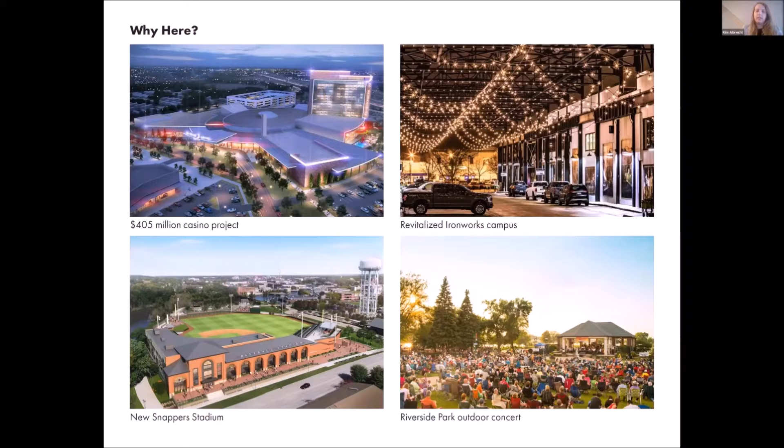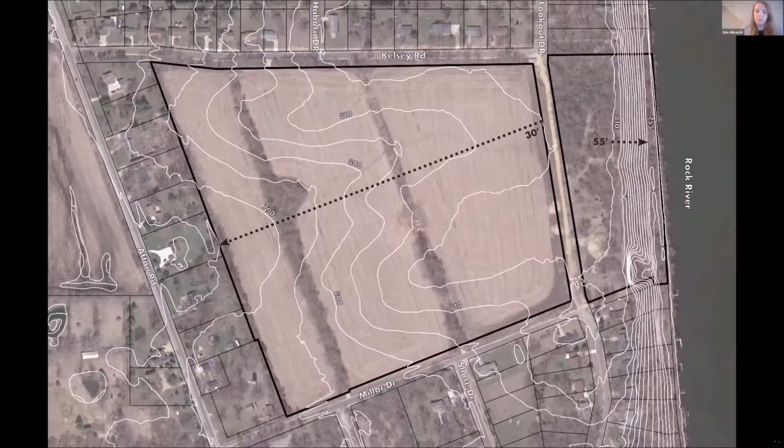So the site's pretty connected by bike and car, but it creates some problems in terms of walking for pedestrians, since there's not a lot of sidewalks nearby.

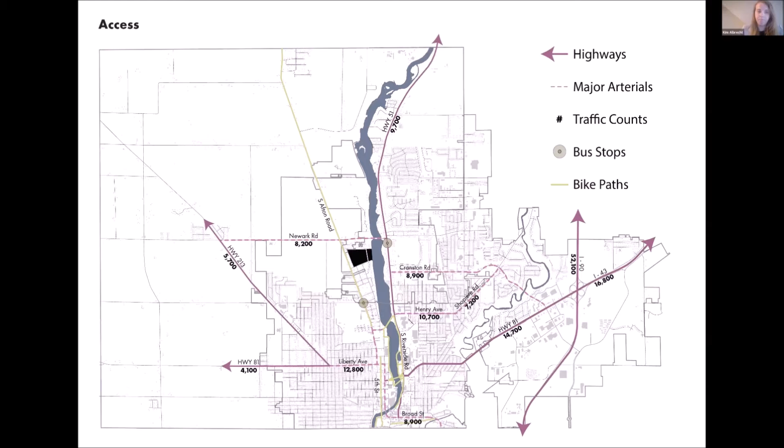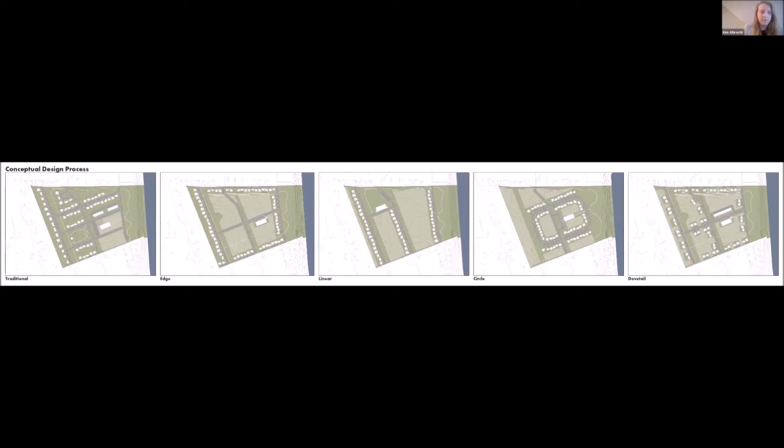So the first one is the traditional development, essentially having houses back to back, larger lot sizes, and a lot of road access points. This one yields the most housing units, with 60 single family homes and 16 townhomes, but the least amount of farmland at 5.3 acres.

And then comments early on related to this one, seeing that disconnect between the community amenities here and the farming with the housing in this area. So that's something that we wanted to change and make sure that they were integrated.

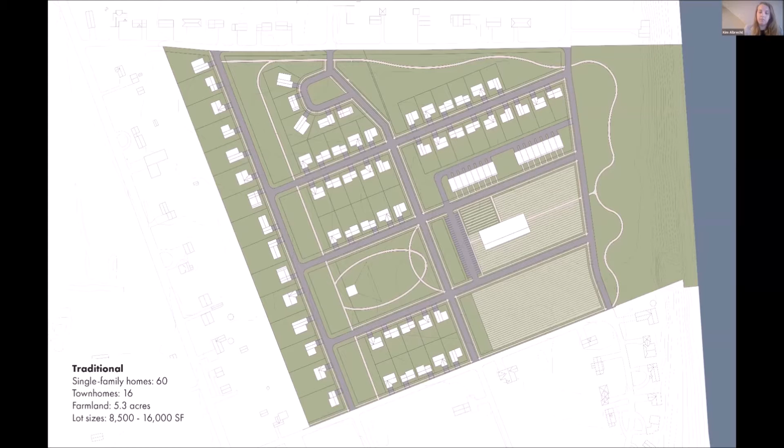So Edge is the next design that started to do that around the border and having those views towards the growing areas, but the way the housing is set up, it kind of disconnects people, the public, from the site and makes it feel more private. And that's something we wanted to avoid, kind of opening up the site.

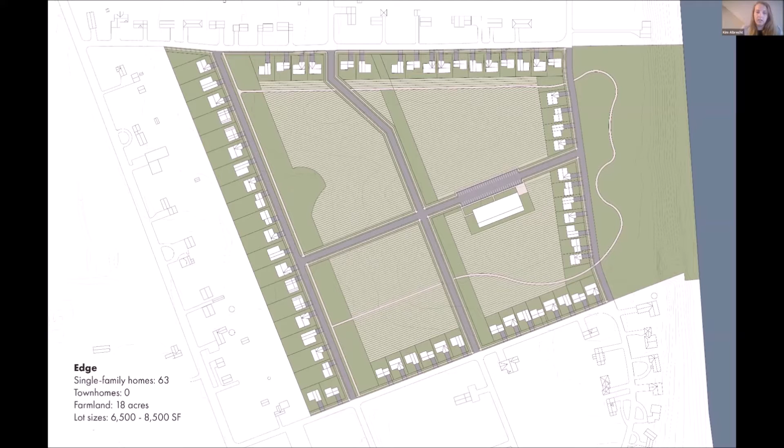The next one being linear produces the most area for farmland, but the least amount of housing. And again, there's kind of a disconnect between neighbors as they're just in lines and separated by the growing areas.

And circles started to blend agricultural and housing development, having it both in the front of houses and in the back. But again, having that barrier around, so it didn't seem as accessible to the public.

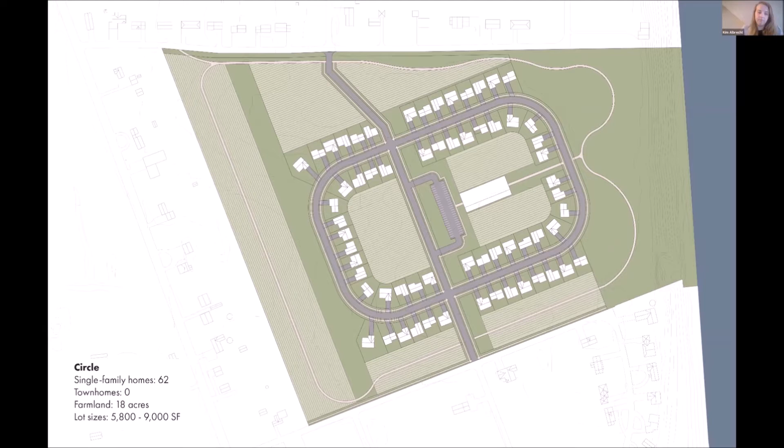So Dovetail is the one that was chosen to move forward with, and it created the best balance between agriculture, recreation, and housing. This one changes a little bit moving forward, but 56 single family homes, 14 townhomes, and almost 20 acres of farmland. So it's kind of the best of both.

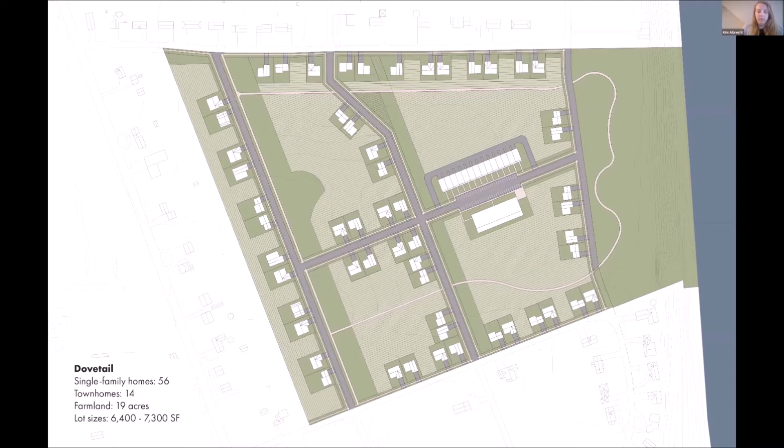So this is a more refined site plan. I'll go through it briefly and then you'll see a different view. There's housing in pairs with growing areas in between each node, and two different types of growing areas: taller row crops shown in these green areas, and smaller row crops shown in the areas between the housing. The larger row crops in the middle are more accessible for larger equipment.

And then moving towards the river, there's more of a conventional park space with outlooks looking out to the river.

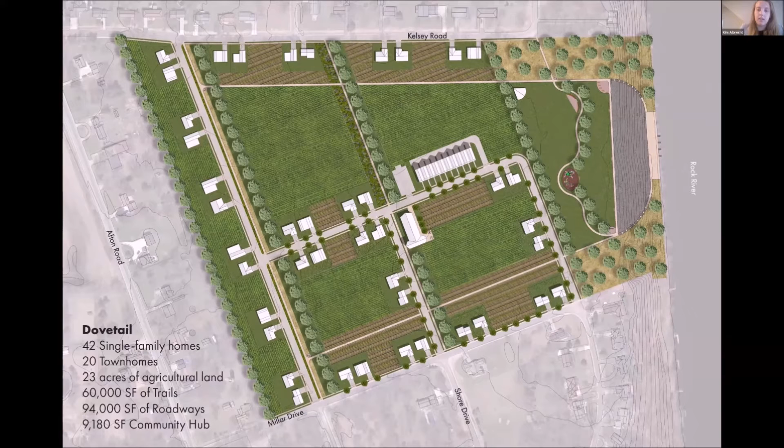Each node and category has its own programmatic opportunities, but these programs are also meant to be fluid with one another and flow throughout the site.

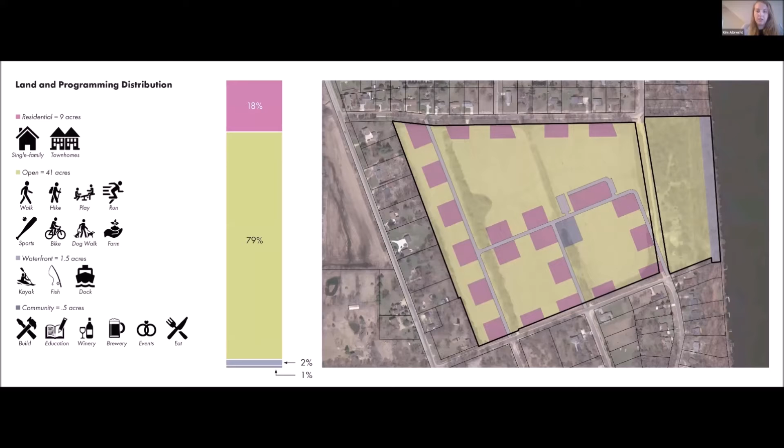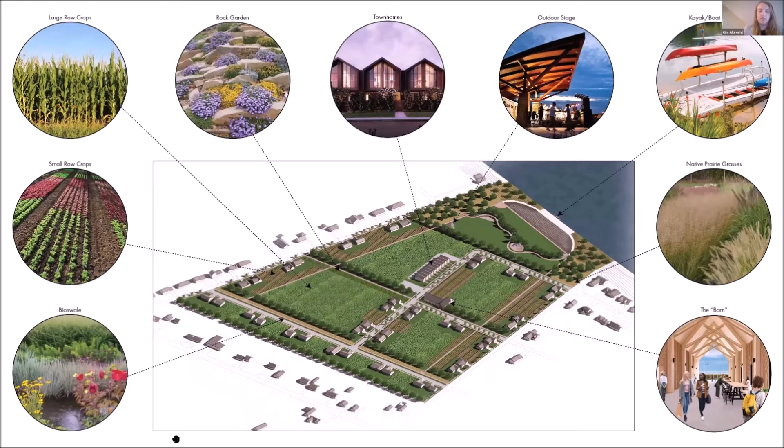So there's certain things I wanted to call out on this map. First, we talked about how the stormwater travels down this way. Having bioswales lining the streets is a way to collect stormwater and have it soak into the ground before entering the sewer system.

The smaller row crops would be smaller vegetables like lettuce, carrots, and beets, so that you can preserve the views between homes. Larger row crops like corn or maybe wheat, depending on the year, go in the central areas that are larger and not as easily done by hand, while the small row crops are easily done by hand.

And then this is an image showing what the townhomes could look like, matching the aesthetic of that community hub that we'll get to.

Having an outdoor stage area, somewhere you could host concerts, a summer concert series, really drawing in people from outside of the community. And on the river, having kayak and boat launches gives people a way to not only access the site, but also have those recreation opportunities.

And then in areas that aren't conducive to growing crops, we have native prairie grasses surrounding that park area.

And lastly, the community space that we'll get more detailed on, that I call the barn, is where you can host a variety of events and farmers markets, a place for the community to enjoy, and also people within the area.

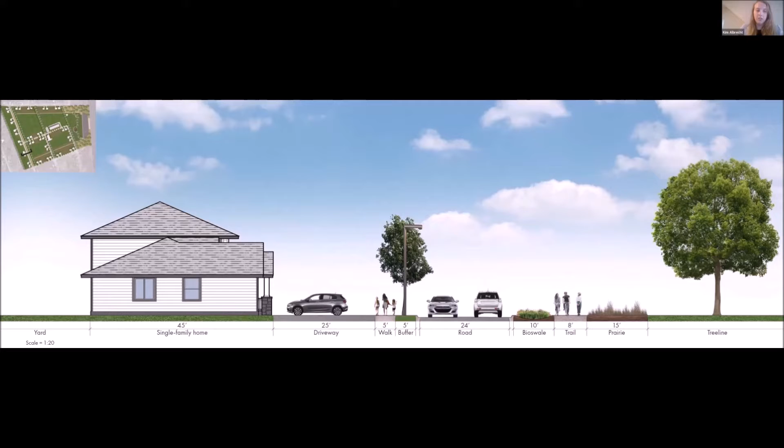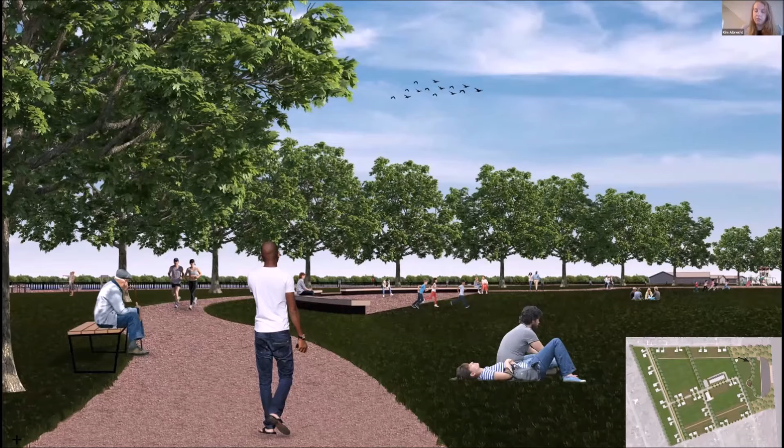This is a view from the more conventional park space with a large lawn area outside the outdoor stage area, so you could have a wide variety of events there. It overlooks the river, with outlook points on the corners to have unobstructed views of the river past the trees, and a playground area for kids. So there's a variety of experiences here.

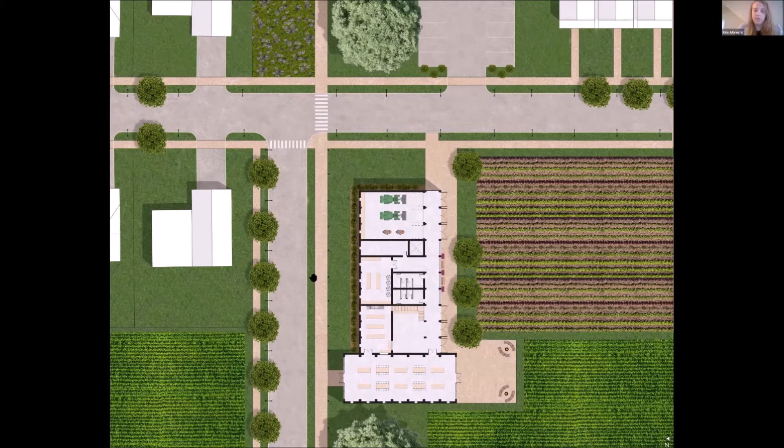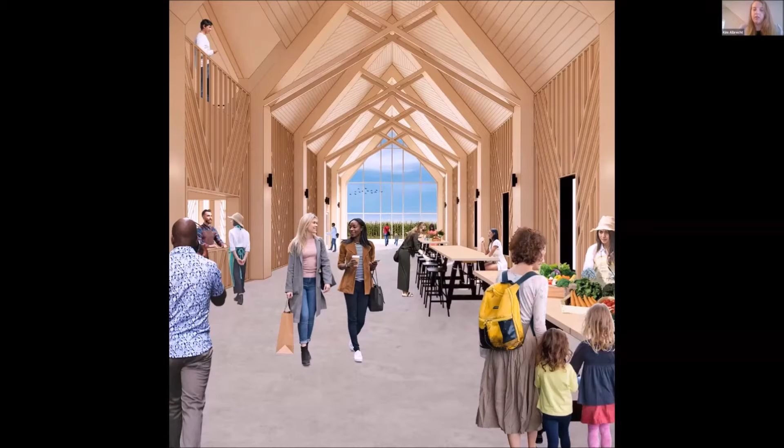This is an interior view of that large gathering space, right now shown hosting a farmer's market. It could be used for a variety of different activities, but essentially having that connection between the interior and the environment is the big key in this space.

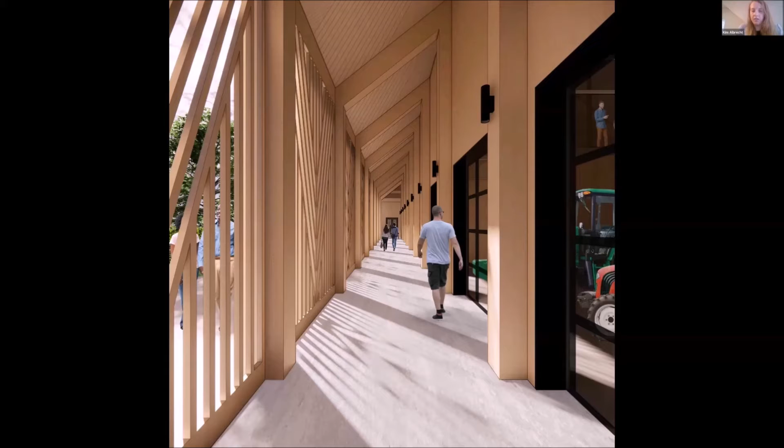This is the corridor that's essentially a screened-in porch, but these lattice systems could open depending on the time of year or if you want more wind through the building, with views into the equipment storage space and towards the growing areas outside.

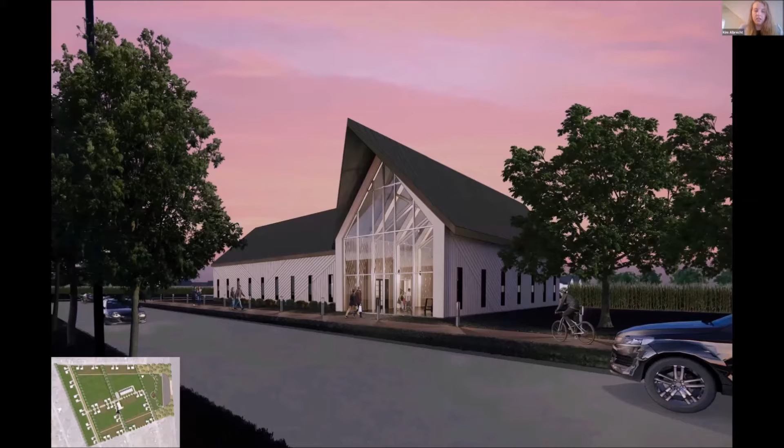So this is the front of the building, the first thing you would see coming onto the site. The orientation of the building was meant to serve as a gateway to the site, with the large gathering space being the focal point as you drive in through the main street, a space you can use at different times of day and year for a variety of activities.

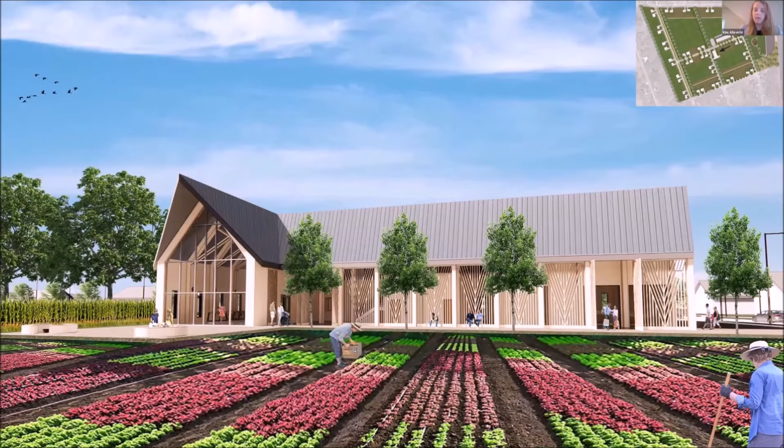This last perspective is a view from the growing areas looking at the building, showing how those screens could be opened up to provide more views and natural ventilation through the building, and showcasing how much activity is going on and how you can be exposed to these types of activities at all times on this site.

Essentially, the biggest idea was to focus on how to make this site outside the status quo. How can we avoid a traditional development type where you see, like on the left here, cul-de-sacs, lack of shared spaces, maybe a sidewalk here and there, houses back to back or fenced in, with no connection to neighbors and no shared experiences. With this design, it's meant to create that sense of community by connecting people to their neighbors and to the environment. So that's it, thank you.

Yay, we're all clapping. Yes.

I'm excited because you've talked a lot about the different scales of community, and you've been able to illustrate from a growing aspect of community engagement and education right down to the community building.

Kim, just be aware as you're turning back on so you can see us, it will cover some of your images as we have a dialogue, so you'll probably need to move some of those. I don't know how to, did that help? Or you can exit out of full screen. I don't know if that will matter at this point, but otherwise I think you might need to just listen to us and not see us. Okay, that might be okay. All right, I can put it back the way it was.

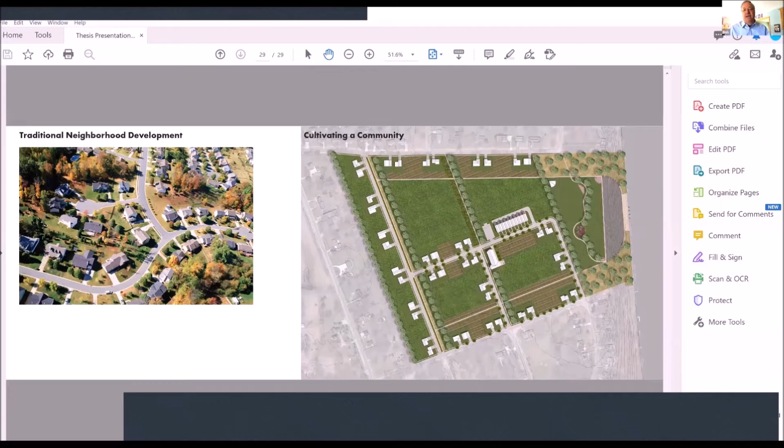Well, first of all, congratulations, Kim, on a superb job. From a Beloit community standpoint, you really hit a lot of the marks as far as what could be a really exciting project in Beloit. The idea of having a community with connection to agriculture fits well with the farmers market we have in town, which is a huge draw, so people are very connected to local farmers. The usable riverfront is really something else. When I first thought about this, I went right to the traditional neighborhood, rolling up a bunch of houses on the riverfront. But to see how this can all be connected, so the residents and the community has access to the riverfront, is really awesome.

Well, thank you, Bob. And one final thing, personally, it's a place where I'd want to live. I had no idea where this was going, but to have exposure to an agriculture environment with a low maintenance, smaller lot, yet having more public area to enjoy, and still have the utilities, sewer, water, electricity, and internet in town that you can utilize while still enjoying that outdoor agriculture feel, I think is just really outstanding. So I'm very excited about it. Thank you, Kim. Well, thank you.

Before we move on to Carl, there is just one question. I know you addressed stormwater management and we talked a little bit about flow. Could you highlight how you imagine stormwater would be managed and the locations for some of those elements? You can use a site plan, I think.

Yeah, so as I mentioned, the site gradually slopes down this way, so I have these beds here along this trail, and beds here along the road. As it flows downward, it's collected here in a divot, which is able to collect a lot of the water and let it naturally soak into the ground, filtrating it before releasing it into the sewer system.

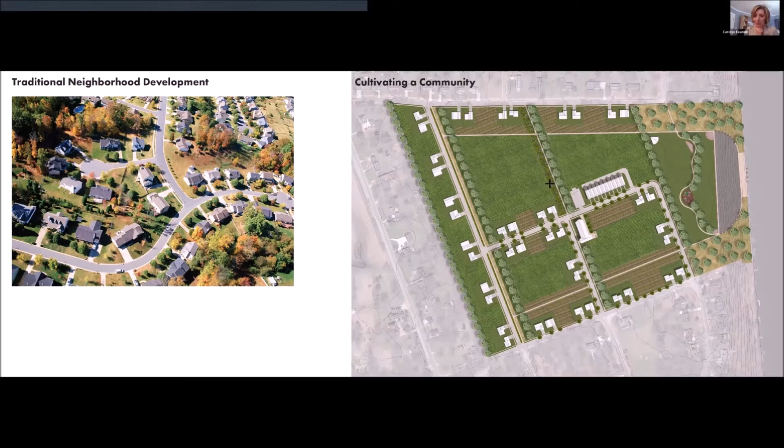Yeah, I'll go back to your first question. Like you said, it was a back and forth of trying to decide the growing areas being visible from the front yard versus the backyard. Kim, as you're talking, show the perspectives that relate to Jory's comments. One is from the porch and one will be your building.

Yeah, so personally, I think what it came down to was how I interact with spaces and people close to me. I personally prefer hanging out in the backyard instead of the street side, just because it's usually quieter. Having that space to enjoy the crops, being focused in the backyard, was a conscious choice, just because it feels safer, more secluded, but also more peaceful.

But then being able to walk out your front door, say you're on your front porch, you can still see those areas maybe across the street. Is as close as it gets for that, or the pieces in between the nodes, like this area here is visible from the front as well, not looking straight out. Essentially it was a decision to have those areas visible from the back. Did I answer that question, or should I keep going?

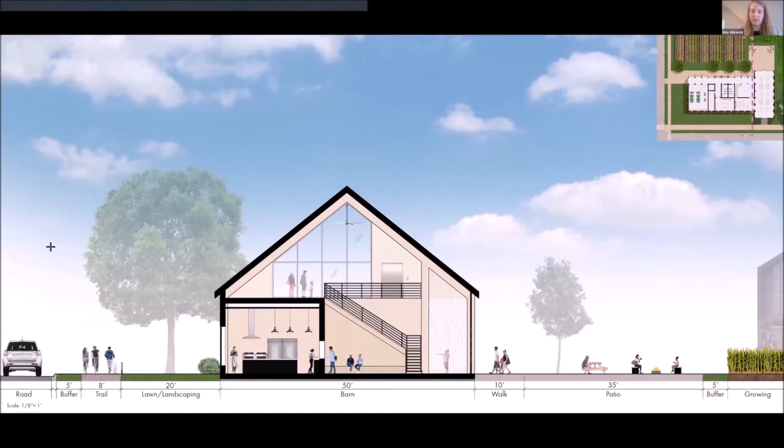No, that makes sense. Just looking at that backyard perspective, my kids and the kids in our neighborhood would be tromping on every crop there, running to get their ball and chase each other. And yeah, that is... you can't do everything.

You can't do everything in these things. It's a great project. Maintaining the crops would be really important, how they look as well. Obviously they're shown here in good shape, but you can't always control how they're going to grow and people stepping on them. Hopefully I usually put at least a buffer between the trails and the crops, so you're not stepping on them immediately.

I think it makes the pathways really important though, the smaller scale pathways. I feel like this whole thing would have a really strong network of the sneaky paths that kids would take to cut between things and move around, and that everybody would take just to get around.

I think the scale of the path is also critical. There were a couple of questions about 8 foot versus 10 foot. In my practice, the only time I've used 10-foot trails is when I have to use Department of Transportation funding and they require 10 foot, but 8 foot is, I think, a more appropriate scale for this. That's how wide a parking stall is, so you can easily have people running in either direction.

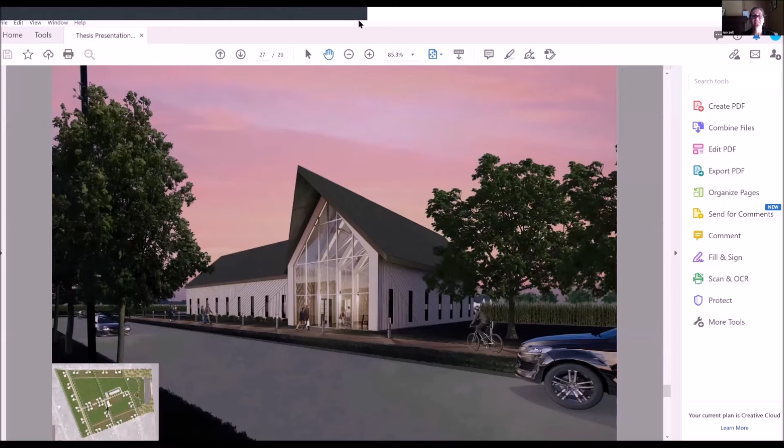Okay, yeah, I appreciate all the feedback and all your help. So thank you for being here. Well done, Kim. Yeah, well done, and good luck. Thanks to all the guesters and for enjoying the rest of your time looking at the SARUP projects. Yes, congratulations, Kim. Thank you. Congratulations. Glad to have seen what you did. Good job, Kim. Good job, Kim. Thanks for kicking us off this morning. Yeah, sounds good. Thank you.

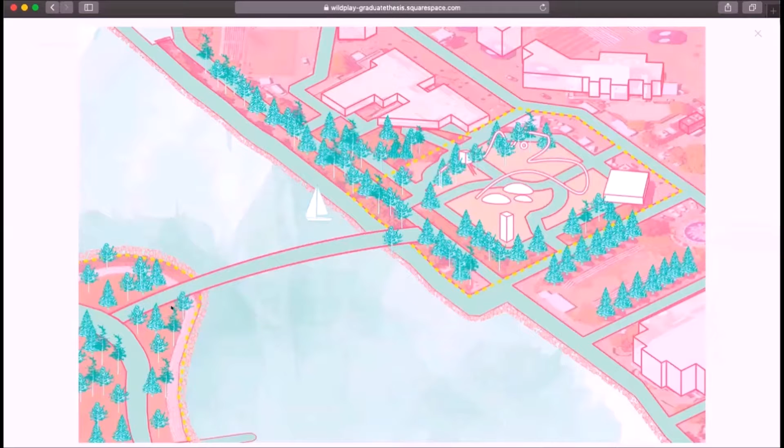The Henry Maier Festival grounds have been around for more than 100 years. The site has a rich history, starting as a train station in the 1900s, becoming the Maitland Airport in 1927, later the Nike missile site in 1956, and eventually home to the Summerfest grounds in 1968. Unfortunately, 9 out of 12 months of the year it sits vacant, which is a missed opportunity given its location along Lake Michigan.

Located in the Henry Maier Festival grounds currently sits a lackluster Children's Zone area, which is not utilized as much as it could be. This thesis looks at how to redesign the Children's Zone area and create an educational experience and new definition of play by creating a connection between the Children's Zone area and the Lakeshore State Park.

To begin the research, verbs that describe both human and animal behavior associated with play were studied and collected. From the chosen verbs, different objects were sketched and defined based on how they would be used by humans of different age groups as well as wildlife.

The verbs that were deemed most successful based on how well they incorporated both human and animal interactions were further developed and evaluated based on how the type of play may shift in correspondence to the season and time of day.

This was done to ensure the site would be utilized daily and seasonally, whether by humans or wildlife. Many different species of wildlife can be found around the site, but only 9 species were chosen to design for based on current or future needs for their survival in urban cities. The list includes the red fox, the great horned and snowy owl, the groundhog, mink, fish and birds of many species, the big and little brown bat, fireflies, and bees.

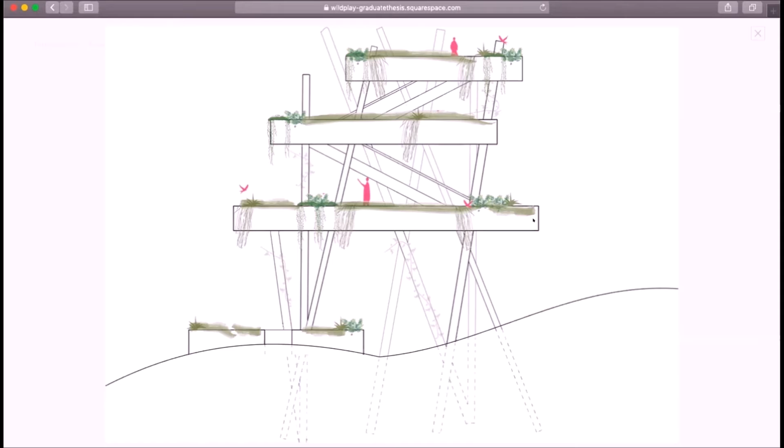The observation tower was designed to imitate a tree to blend into the site. The legs of the tower resemble the trunks and branches, while each floor can be thought of as the crown of a tree. The form of each floor is also irregular and fluid, much like the topography below it.

The legs of the tower extend into the water below and are covered in vegetation, which help create habitat. The legs are also made out of wood, which will help attract an array of fish. A rich aquatic life within the water basin promotes healthy underwater vegetation, as well as fishing opportunities for those visiting.

Similar to the observation tower, the elevated path creates views above the site, whether utilized by humans or wildlife. The design of this path was influenced by the organic nature of Lake Michigan, which the site is situated on. The elevated path also connects to the Lakeshore State Park, which benefits the children at the Education Center to ensure a quick and safe navigation to and from the park.

It is also a necessary connection point to help encourage wildlife to travel this path instead of nearby roadways. The elevated path will be supported by the surrounding trees that currently inhabit the site, as well as additional trees planted and the bat and owl towers.

Located within the path is a 500 square foot netting structure. This structure acts as a trampoline for activity in the daytime, but will also serve as a relaxation spot, especially at nighttime during concerts under the pavilion, providing a place to relax and listen to music filling the park.

Along with the trees being used as structure to the elevated path, the bat and owl tower will help support the path in specific areas. The bat and owl tower is designed to inhabit bats through 6-inch vertical openings.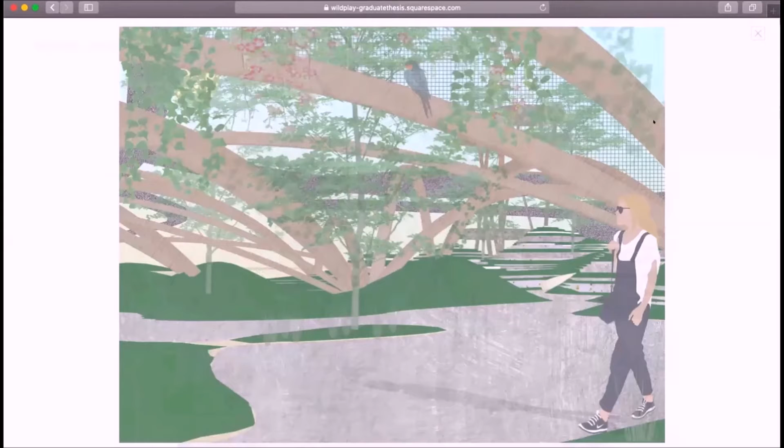Specifically at the entrance, there are two gardens on each side of the path. The spanning of the pavilion above also helps birds fertilize both sides of the garden. The garden will also be surrounded by natural wood, which creates habitat for fireflies and bees. Both of these species, in return, promote a healthy garden.

Students at the Educational Center will benefit by learning about the ecosystem of a garden and the wildlife and species that inhabit it.

Today, there is a current plan to add an educational center on the Lakeshore State Park. This park is already limited on native grasses, so including the center on the wild play site will create more space for habitat at Lakeshore State Park.

The Education Center is located on the south end of the site, under the rolling mounds. Having the center pushed underground allows for use on top, which grants more space that may be used for play and habitat. The form of the Education Center was influenced by the topography above.

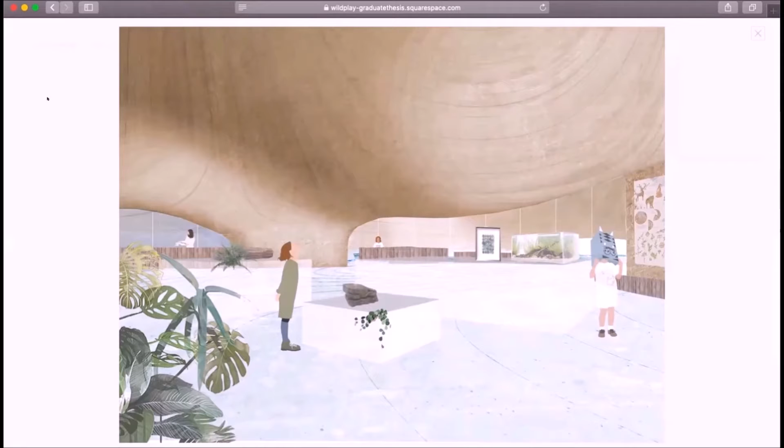Moments of glazing are also included in the mound layers to allow in light, which influenced where the programs were located in the Educational Center.

As well as entries within the mounds, there will also be back entries which will be able to be seen and peel up from the sidewalk view on the right side of the festival grounds.

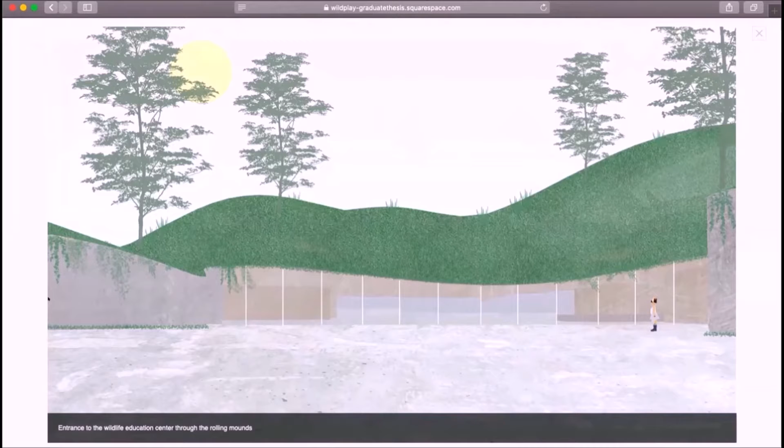The Education Center will host students on school trips and weekend activities for park visitors. Those at the Educational Center will get the opportunity to learn about wildlife in their native habitat and be able to be an active participant in nature. Workshops and galleries will also be hosted by the Educational Center, available to those of all ages.

Another important aspect of this project is to really understand the perspective of the wildlife inhabiting the park. Down here, you will find a perspective of each of the chosen species and what it would be like to experience the site through their eyes. I've also attached an accompanying audio to help you further place yourself in their perspective. I will briefly take you through these, but I invite you to further explore them on your own for better image quality.

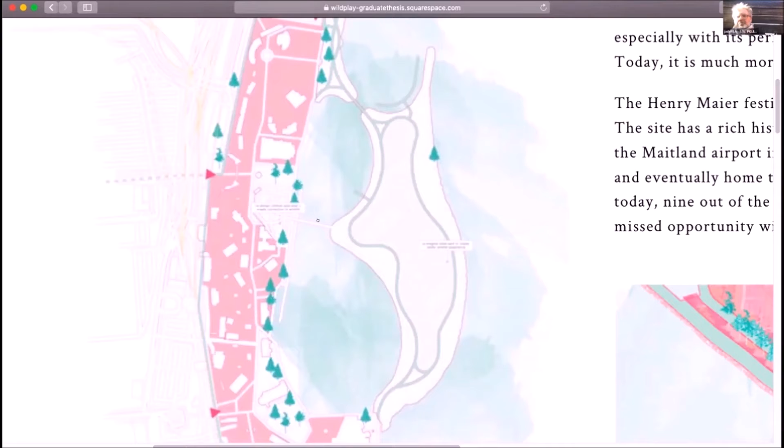So the idea is that there's a bridge there as well, so that bridge where your mouse is right now, that would be new. Yes, sorry. So this is like an implementation of my design and the current conditions, it was kind of like pre-design work. But yes, as you can see right now, there's only 2 bridges that cross over to Lakeshore State Park, and implementing another bridge is really just to draw that connection even further.

And it almost looks like there should be a bridge because of that dip in Lakeshore State Park. But further, it's funny because after talking to the DNR manager, there's supposed to be an education center going around this area. And I asked why they wouldn't put it over here, and they said because they need to have bathrooms for the kids, and they can't walk those bridges that are that far. So that's why I also implemented a bridge that's going directly across, so that kids going from the education center to the Lakeshore State Park make an easier connection.

Okay, I think let's see if I can do this here. Maybe I can - there it is. Is it this one? I have no idea where the damn thing is. Yeah, I don't know if I can draw. Yeah, I can draw - look at that. There we go.

One thing I'm curious about, if I understand this correctly, we can come in from above, right? Yep, and at the moment we can walk down here, and when the park is open we can also go through the Henry Maier Park, and then do the circuit and walk back up. So the thing I'm curious about, maybe it's a criticism too, is you're creating this little enclave that we can essentially go visit, but we have to know about it ahead of time. It's not something that's naturally visible, with the exception of this bridge we can cross over.

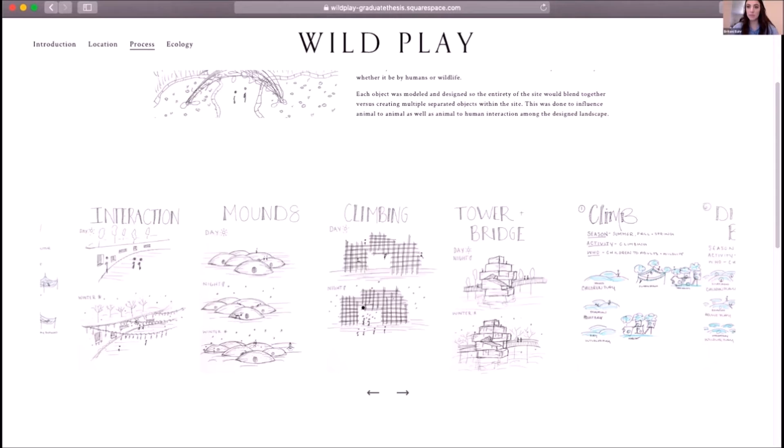And then based off of those ones, I took it even further and started to look at how they would be used in a day and night sense, and then also took it one step further and thought about how it could maybe be used in the warmer months versus winter.

And then from there, it was kind of back and forth between sketching and modeling. But that's when all of the COVID happened and we kind of got shut inside. So then everything went more digital, and I was still trying to form-make and make decisions through making forms, but in a digital world, if that makes sense.

So I was going back and forth between Rhino and Photoshop to create all these images. I have a Mac, so I don't have the ability to have any rendering programs on my computer, so that was a little bit tricky - it wouldn't necessarily have been otherwise, but yeah.

I think that might be something to add to your website - you showed us your sketches, but I would love to know how you tested those sketches. Particularly in the world of living indoors and not having tutors to go talk to, and not being able to sit next to somebody in studio, but that is critical - you learning that process of your own design ability is testing ideas.

The sketches at the minute kind of show us how you thought about that, but did you do sections, those sorts of questions? I think that would be an interesting aspect to your website. We expect our later students to really reflect on method and methodology, going into a PhD or something like that. So if you have time to add that to your website, just a reflection on that, and the testing of all these formal moves you've made, I think would be very useful to you, and also to show people your method.

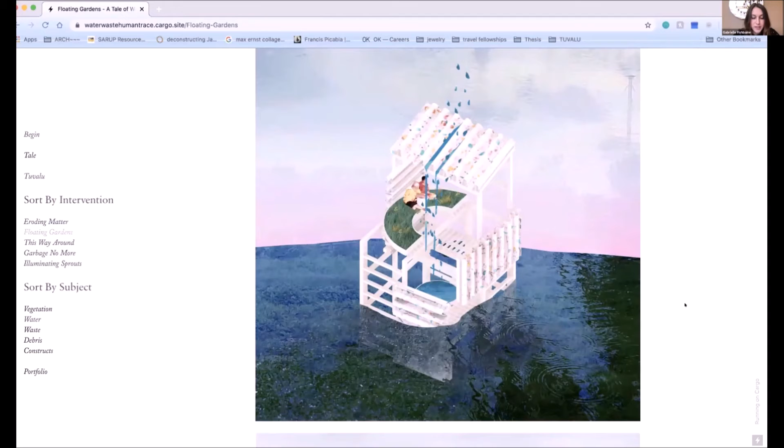The shading elements are made up of recycled plastic from the intervention entitled Garbage No More, which we will get to shortly. They can be attached in various orientations, protecting visitors from the sun, directing the water to the garden bed and catchment systems below, which provide a source of fresh water, a scarcity for Tuvaluans.

Rainwater is the only source of fresh water on the island. With each notch up, the garden beds are lifted up and away from the ground, while also providing a visible cue of the impact of these natural processes.

While in Funafuti, I observed these lifted platforms where people lounge during the day, nap, and the way the beds are lifted up off the ground are very much so inspired by these. Here's an image of the landing strip that becomes a large soccer field, and you can see the livestock pens in the background.

As we journey up towards the northern tip of the island, we come across the thinnest width of land, connecting the southern and northern parts by a bridge. This bridge is the only route to get to the Funafuti dump site, which collects all of the waste on the island, and the many homes located in the northern portion of the island, making it an essential route.

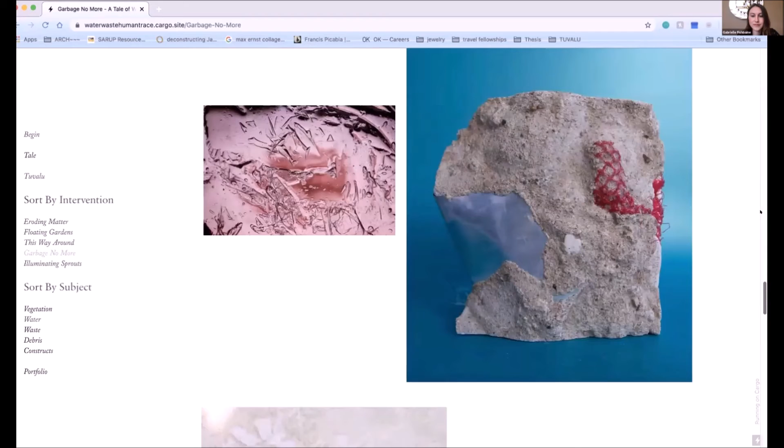These are images from the existing dump site. This is where waste from the entire island is kept. Once you go through the entire site, you're able to get to the very tip of the island and look out towards the other islets.

At the end of the island, just past Garbage No More, we come across the last intervention, entitled Illuminating Sprouts. As the lagoon, ocean, and sky flood the land, illuminating sprouts emit color dependent on the amount of water collected in the water tank below.

This is a way for Tuvaluans to quickly visualize the extent to which water is rising. The wind creates the dancing movement of the sprouts, surrounding those who visit. The collected water provides an additional source of fresh water. Looking up at the sky with the sprouts fluttering around.

This intervention was largely influenced by this model, which was exploring how such a delicate entity is able to be embedded into a solid, rigid form and still be able to have life.

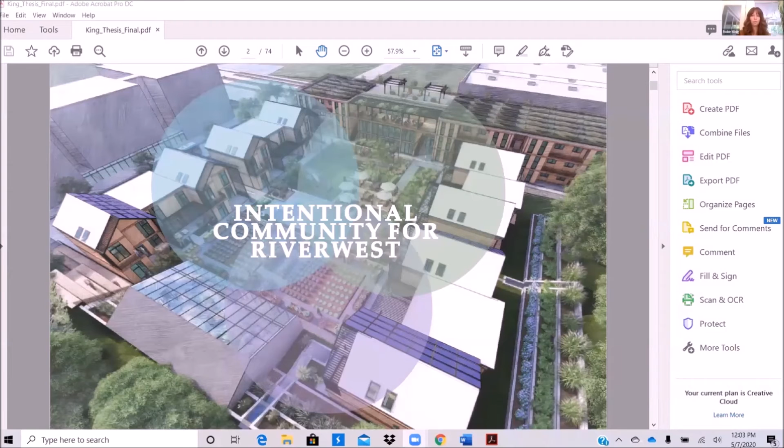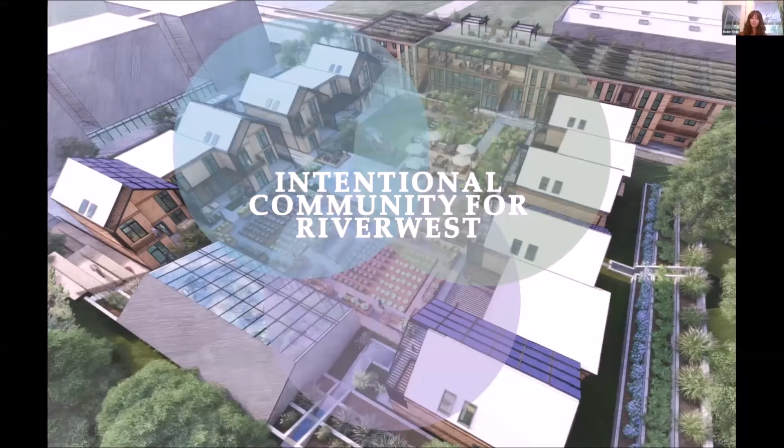These communities typically include apartments and houses for naval personnel and their families, parks and playground areas, schools, chapels, stores, even a bowling alley and movie theaters. And there were organized activities for kids and families all the time.

But then when I started high school, my dad was stationed at the Pentagon, so we moved to Washington, D.C. and lived in a normal suburban neighborhood. Although our neighbors were friendly and there was the occasional cookout, it lacked the social cohesion I was accustomed to. Since then, I have been passionate about learning what makes a community truly thrive.

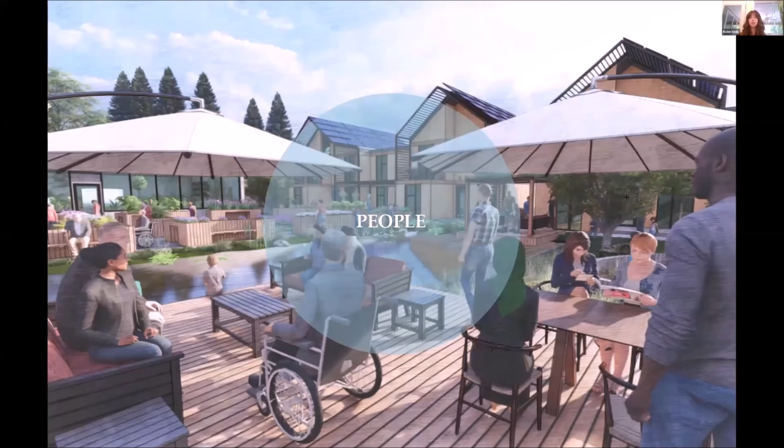With intentional communities, it's their ability to embody the triple bottom line, or people, profit, planet. Intentional communities are typically formed by a group of people who share ideals or views, and community bond is a driving factor. There is large value placed on planned social events, community meals, and chance social encounters with neighbors.

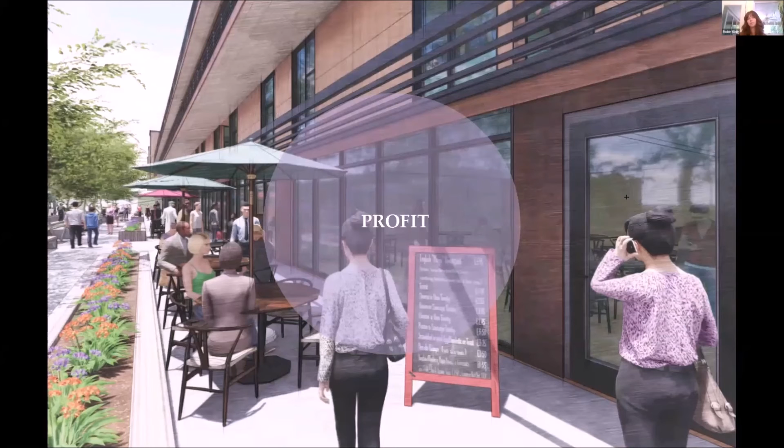Intentional communities are structured as condominiums or cooperatives, where you have ownership of your dwelling unit, but share the responsibility of the land and common space. They also promote lifestyle affordability with shared meals, shared childcare, car sharing, etc. And many of these developments also have rentable commercial space to benefit the community.

These communities are often environmentally conscious and can implement sustainable strategies on a community-wide scale.

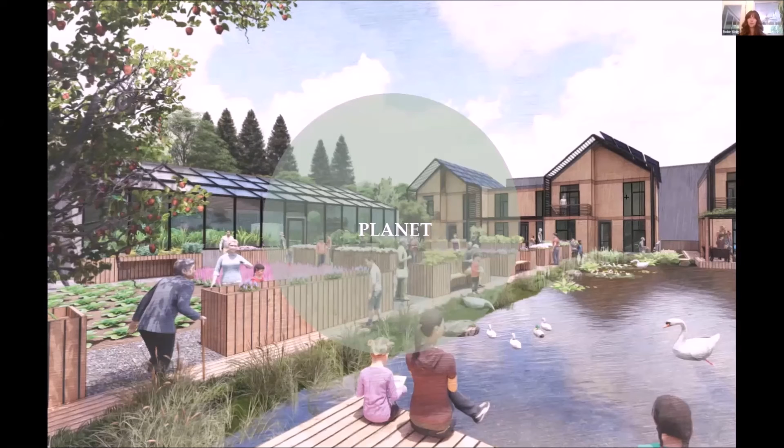So I looked at 6 different models of intentional communities and drew out 6 patterns of successful ones. The first one is co-housing, and co-housing is a community of private homes clustered around a common space. The focus is on people, and the nucleus of that is the common house.

Co-living is shared housing with shared intentions, and co-working is also very common in these spaces. This is more profit-oriented, and live workspace is essential.

Housing cooperatives are a different type of ownership. The cooperative or corporation owns the building, and the residents have shares in the company, and those shares include their dwelling unit. It can be very profit-focused, and rentable commercial space is common.

Eco-villages are communities that strive for sustainability and lessen possible negative impacts on the environment. Naturally, they are planet-oriented and ecological interaction is prevalent. In communes, which are groups of people living together and sharing possessions and responsibilities, they are also planet-centric and focus largely on agriculture.

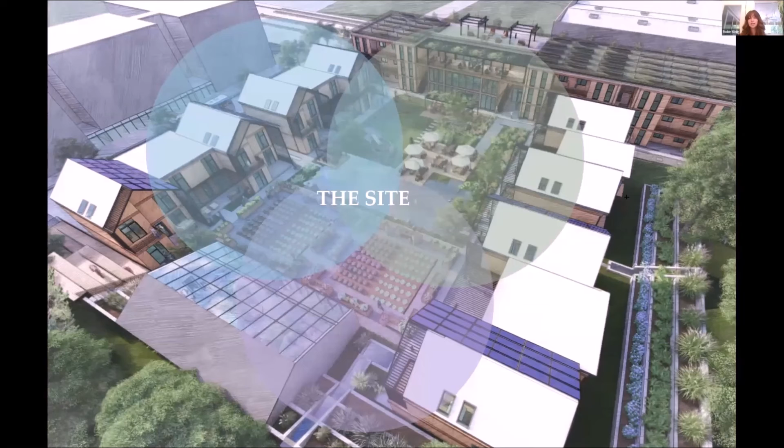These elements present in good intentional communities are successful when blended together in culturally and site-specific ways. My site is located in the Riverwest neighborhood of Milwaukee, Wisconsin.

Milwaukee is located on the western shore of Lake Michigan. It is the largest city in Wisconsin with approximately 600,000 residents. The Riverwest neighborhood is located on the western shore of the Milwaukee River and has approximately 30,000 residents.

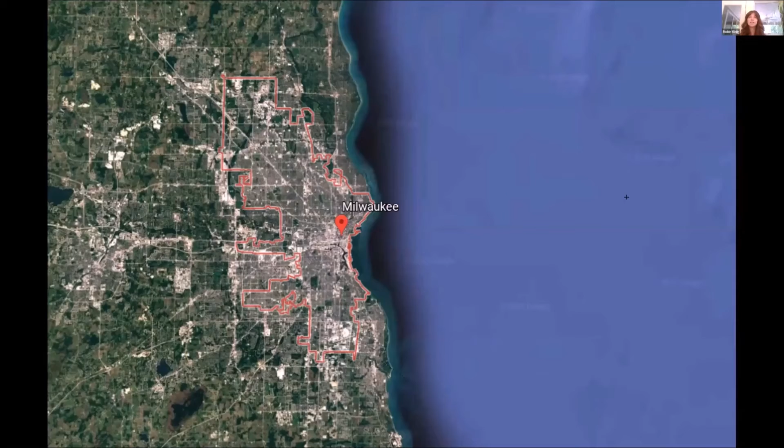This neighborhood has seen significant changes over the past 10 years as the area gentrified. It is now one of the most racially diverse neighborhoods in Milwaukee, but home ownership has decreased significantly. Now over 70% of residents rent and 31% of residents live below the poverty line.

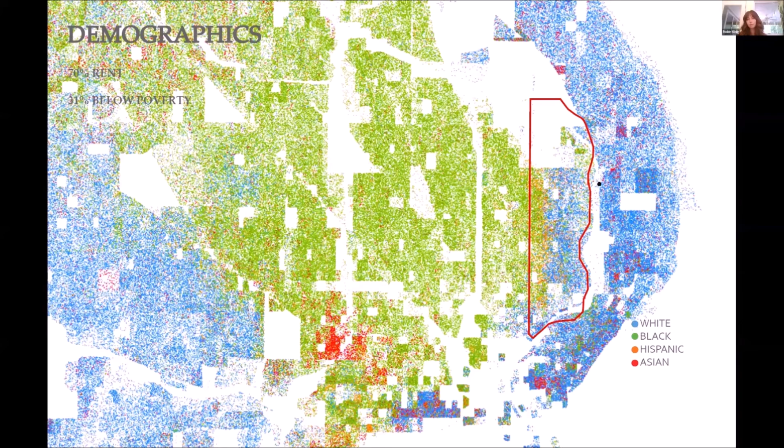My site is located on North Avenue, adjacent to the Riverview dormitories and the Milwaukee River, and extends west to Humboldt Avenue. I selected the River West neighborhood because it was a location that could support and benefit from an intentional community.

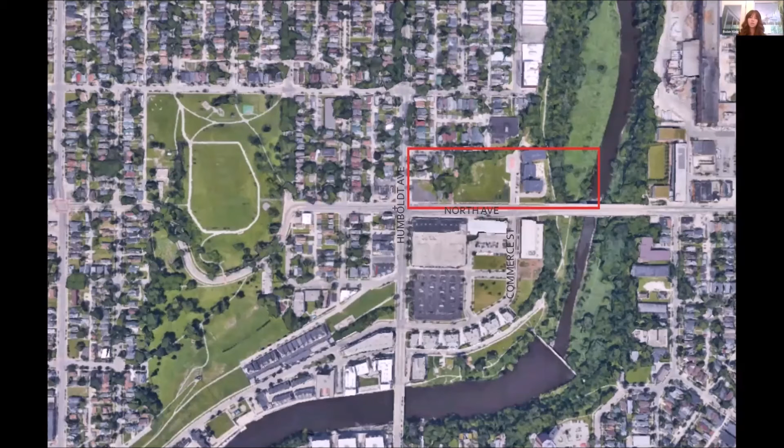Over the past 10 years, this neighborhood has become more transitory and without a heart or center to the community. During this time, many medium to high density housing projects have been built along the river on Commerce Street, and these buildings were built for isolated housing. Most of these buildings have no community space, and the neighborhood has little to offer in that regard as well. Although there was a significant increase in housing, there was little new development in commercial aspects like restaurants, and there are few places to gather or have chance social interactions without going across the river.

However, this site does have some advantages. It is located directly across the street from a large grocery store, a Pick 'n Save. It is also located adjacent to the Milwaukee River and the Oak Leaf Trail, which has over 160 miles of paved bike path. The North Avenue Dam is just south of my site, meaning the part of the river adjacent to my site has a natural ecosystem before it flows through the hard edges of the Milwaukee Riverwalk, downtown, and out to Lake Michigan. To the west of my site is Kilbourn Reservoir Park, which hosts community activities like live music.

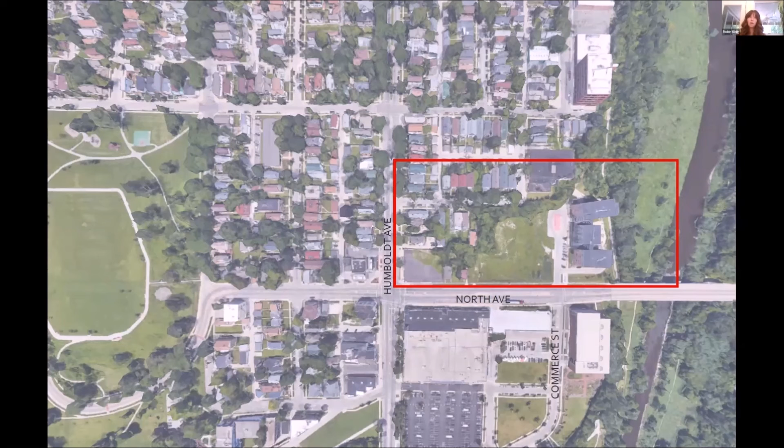This is my site as it is today, with the existing single-family homes to the north, Riverview dorms and the river to the east, North Avenue directly south with the new apartments lining Commerce Street, and Humboldt Avenue to the west. Both Humboldt and North Avenue are busy streets accommodating roughly 20,000 cars a day.

So the first thing to do would be to put the streets on a road diet. This would reduce vehicle speed, add a median as a buffer between bike and car lanes, and widen the sidewalk on the north side of North Avenue. This widened sidewalk would create a nice microclimate to accommodate outdoor cafe seating and increase pedestrian traffic.

To support this, I'm proposing a mixed-use development to hold the corner. This would create commercial space on the street level and housing above.

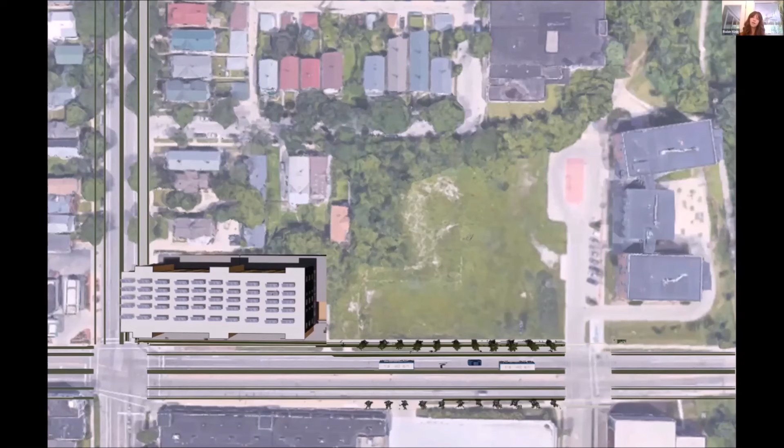East of the mixed-use building would be the common house, which serves as an anchor to the intentional community. On the left and right of the common house would be apartments for the residents of the intentional community. The common house and apartments sit on a plinth that houses more commercial space on North Avenue. The building serves as a wall to create some privacy for the intentional community.

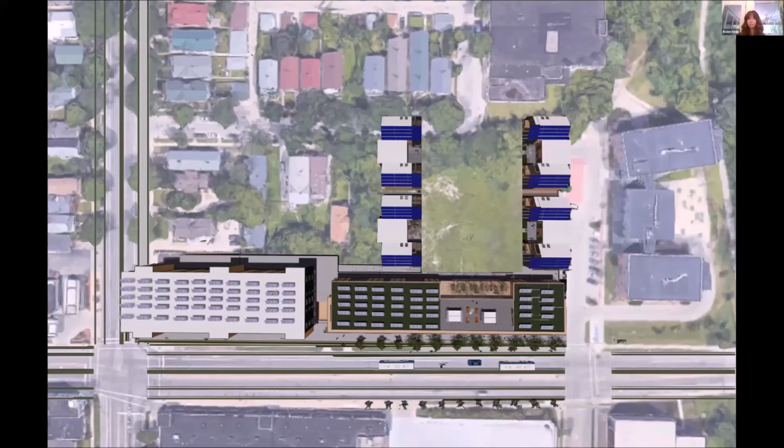In the intentional community are rows of north-south oriented gabled roof houses, a greenhouse centered on the north edge of the site, and the north and west edges would have terraced retaining walls to respond to the grade and create a flat community center for gardening. This also includes a ramp on the northeast corner connecting the neighborhood above and the community down to the Oak Leaf Trail.

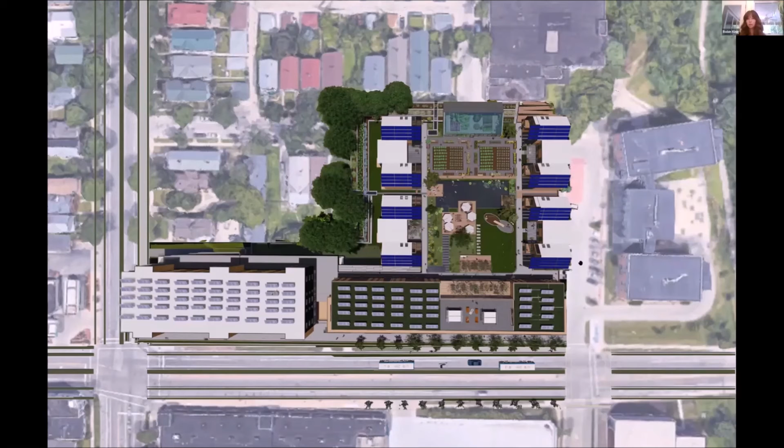There is a large retention pond and several other water features to channel water to this pond, and various spaces to live, play, and socialize outdoors. The main vehicle access to the community would be shared with Riverview dorms, so the existing entry would be modified with planting strips and lined with trees to create a boulevard benefiting both communities.

The site, including the proposed mixed-use development, is 1.9 acres. Less than half, or 0.8 acres, is taken up with the housing footprints. So 1.1 acres is left as open space.

Now, let me show you the plans.

Level 1 houses the commercial space for the common house building, and behind that is a parking garage accessed off of the new Riverview Boulevard. This garage is for the apartments and the row houses on the west side of the site that do not have private garages. Along the boulevard are the private garages for the east side row houses. These houses also have flex rooms that can serve as live workspace.

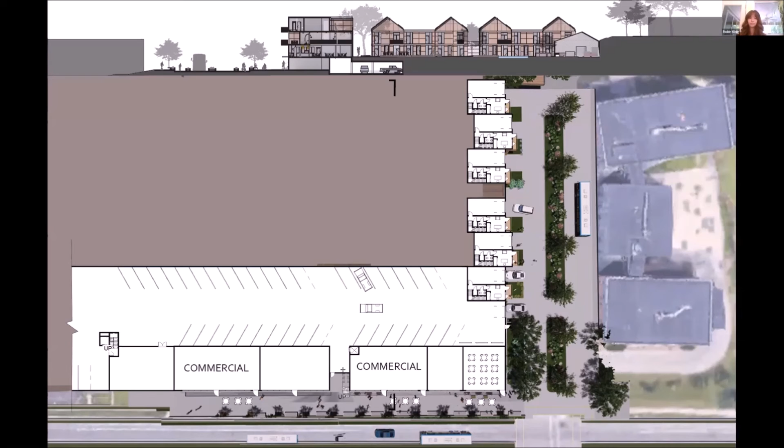The heart of the community is one level up, and the primary access is through the stairs and elevator portal to the common house. From that portal, you can enter into the common house or continue into the main garden space. The primary entries for the row houses are on this level, as are the entries for the garden level apartments.

The apartments are divided by micro portals here and here, and every unit has private access from the exterior. The row houses are multi-story with internal circulation, and all apartment circulation is external, with the upper levels of the apartments accessed off of the stairs in the micro portals.

Each portal services 6 units, 2 on each level, and the common house levels are all accessed off of the main portal.

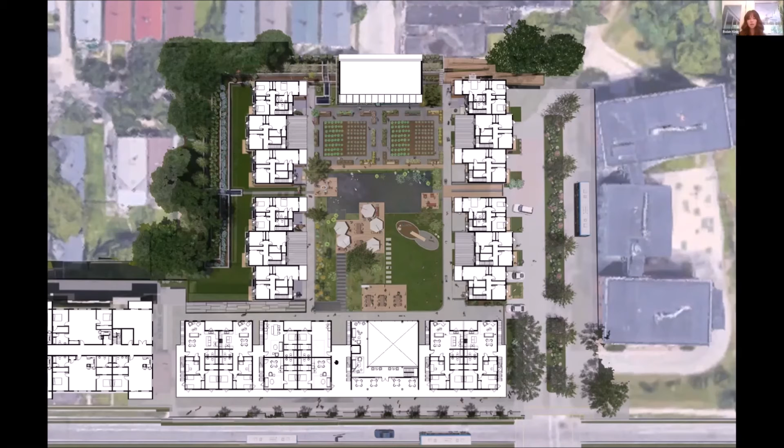All apartment levels are identical with 4 2-bedroom and 4 1-bedroom units. The upper 2 levels of the apartment each share a balcony on the south side, allowing for additional egress and a place for neighborly socialization.

There are 36 total dwelling units in the community: 12 1-bed and 12 2-bed apartments, 6 3-bedroom houses, and 6 4-bedroom houses.

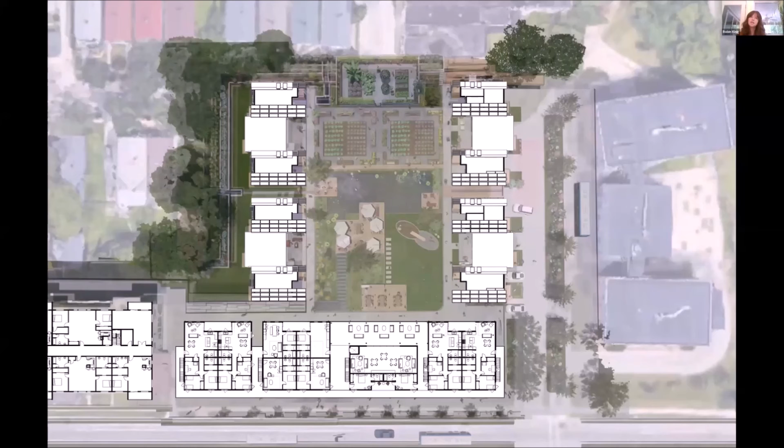The 6 homes on the west side of the site are 3-bedroom units and approximately 1,400 square feet. The east side units are approximately 1,700 square feet. These units have private garages and an additional bedroom and half bath, and this room could be used as a live-work office space or for additional separation in a multi-generational family household.

The second level hosts the main living space with a great room and has a flex space and balcony. This flex space has sliding doors on 2 sides so that it can be enclosed or open to the room. I have it set up as formal dining in my render. And there is a covered patio space connecting each unit to the green space.

The third level houses 2 bedrooms and a bathroom and a master suite. And off of the master suite is a balcony facing the green space.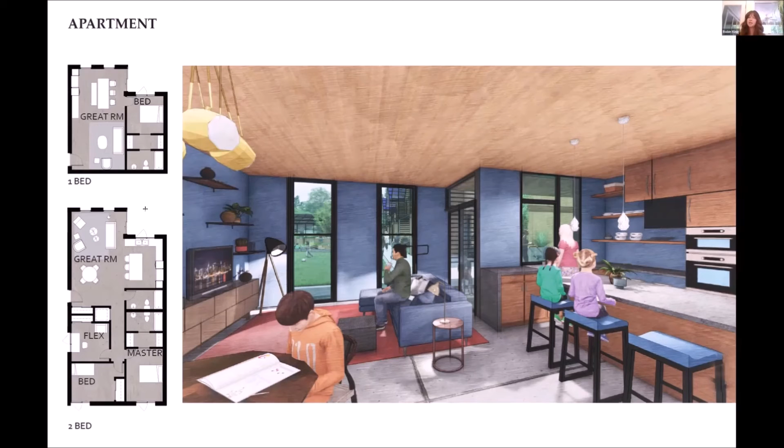And from the great room, all units either have direct access to the green space or a balcony overlooking it. This serves to promote a sense of neighborly connection.

This is the garden level of the common house. This houses the kitchen and dining hall for community meals. It would also be a flexible space for other community events. This level opens up directly to the green space and has additional dining space out on a patio.

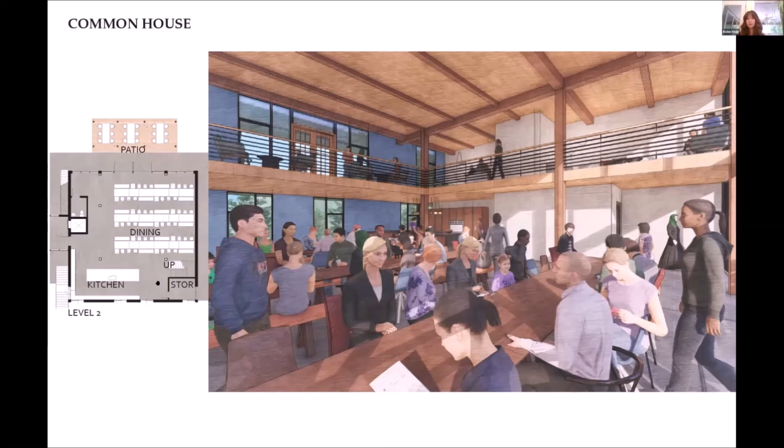Above that is a mezzanine level that looks down to the dining hall below, and it is set up as a casual lounge space with tables on the balcony on the south side with views of downtown.

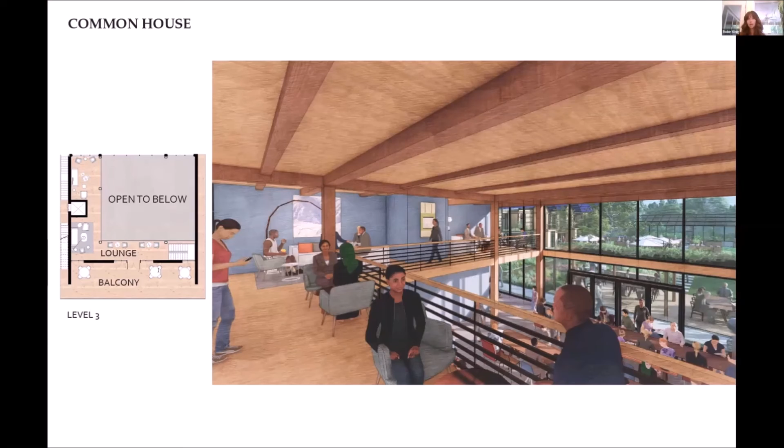The top level includes 2 guest suites facing downtown and a community room with a large balcony facing the central green space. This section shows the sun coming into the building and the shadow it casts on the green space on both the summer and winter solstice.

Sun and shading will become increasingly important for a resilient community. In the next 50 years, days over 90 degrees will more than double from the 20 days a year currently to 48. So the balconies on the south side of the building help to shade, as does the trellis over the commercial space, and the building itself helps shade the patio directly off of the common house.

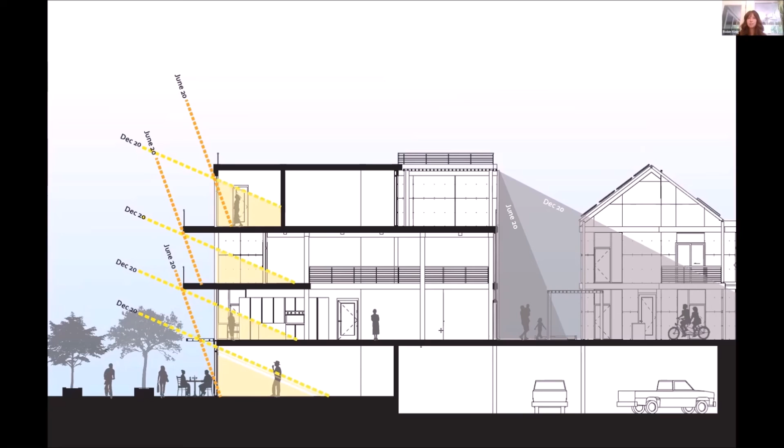Now, let me show you what it'd be like to live here.

This is the new North Avenue, with widened sidewalk to allow retail space to extend out for outdoor seating. And the main portal is accessed off of this, near the center of the building.

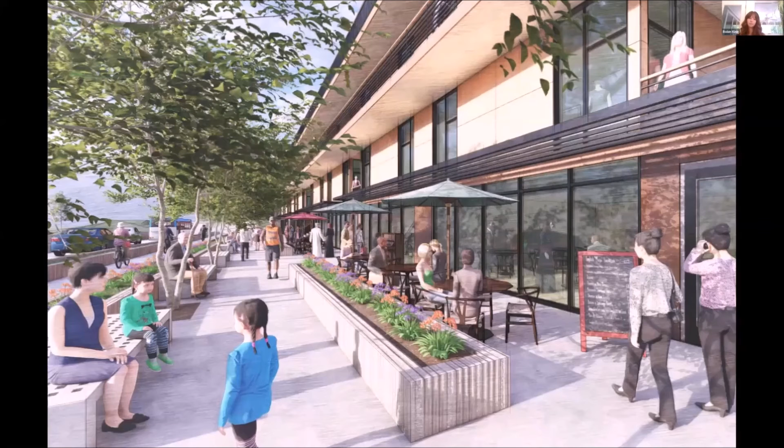There are approximately 255 standard size solar panels in this community, assuming the units consume an average of 28.9 kilowatts per hour per day. With 36 units, that's 1,040 kilowatts a day, and a standard PV panel produces 1 kilowatt per hour with approximately 4 hours of direct sunlight a day. This would produce 100% of the electricity in my community.

This is looking back at the portal and common house entry. You can see the shaded outdoor space and grill adjacent to the entry. The buildings use cross-laminated timber as the structure and are clad in wood Prodema panels to emphasize the CLT.

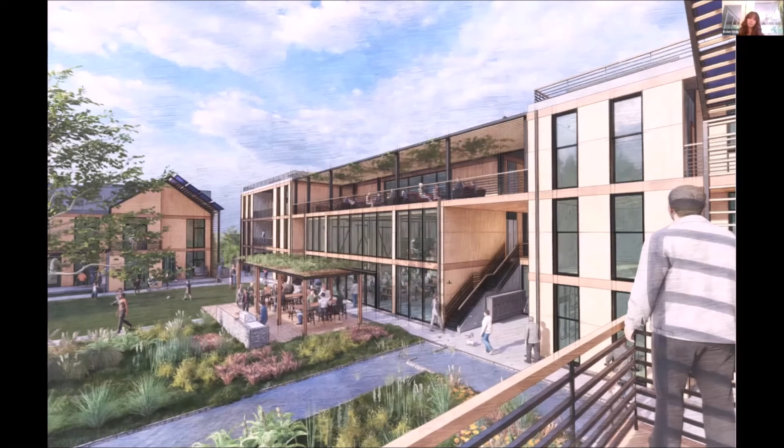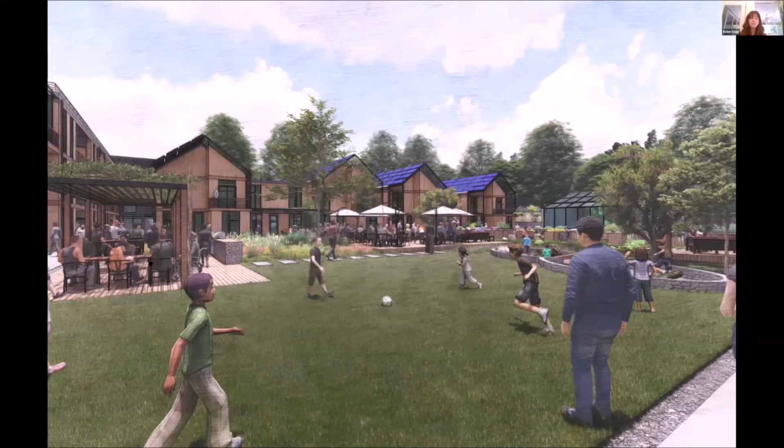The common house opens up to the shaded outdoor patio, field, and playscape for games. You can see various public gathering spaces as activity nodes dispersed around the site, and the trellis structures over the row houses.

The trellises house PV panels and serve to create semi-private spaces as a transition from the common green space to the private units.

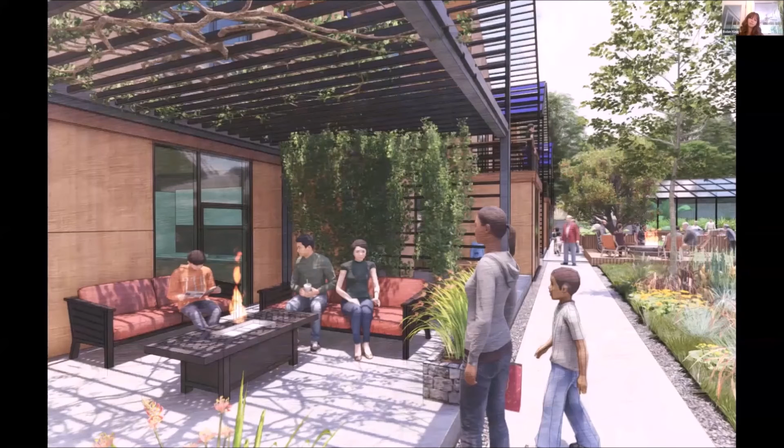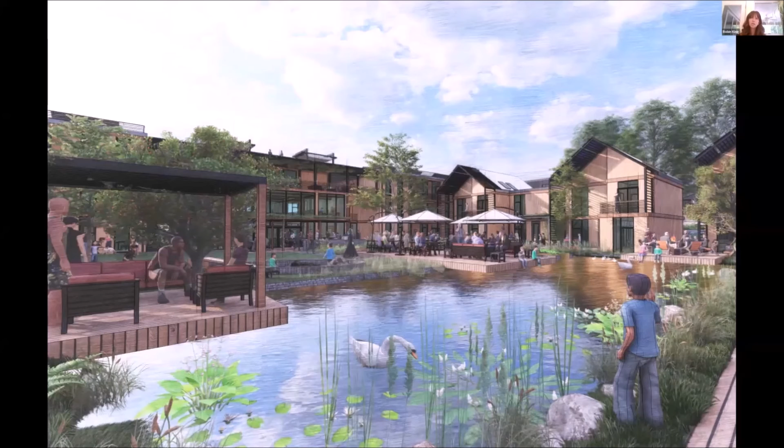Water is an integral part of this community. Milwaukee uses a combined sewer system where wastewater and rainwater go into the same pipes. This is a problem during heavy storms, causing the sewer to back up and overflow into the streets.

Milwaukee is taking steps to reduce the amount of stormwater going into the sewer with programs like disconnecting downspouts, having the rainwater flow into your yard instead of the sewer. But impervious pavement runoff on urban and suburban streets and rooftops is one of the most severe water quality impacts in the US.

To address this, my design harvests the rainwater on my site and the surrounding neighborhood to the north and west, then filters it through biofiltration gardens before it flows back down to the Milwaukee River, cleaning the water and keeping it out of the sewer.

The retention pond and filtration gardens create nearly 6,000 cubic feet of rainwater storage. This is approximately 10% larger than the site's current rainwater storage needs, allowing the system to accommodate the continual increase in precipitation.

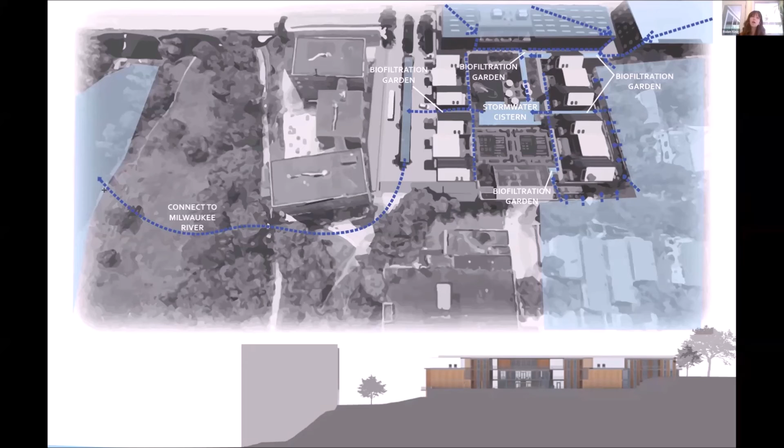And this water would also be used as irrigation for the gardens in the community.

The site includes a greenhouse and an outdoor gardening space for food production. Outdoors, there's in-ground planting space and raised planter beds that are ADA accessible, providing approximately 2,000 square feet of growing space. The greenhouse provides an additional 1,000 square feet of planting.

This would produce about 3,500 pounds of food per year. That's not enough to feed the whole community year round, but it is more than adequate for community dinners a couple times a week.

So my goal was to create an intentional community utilizing these patterns to support the triple bottom line ideals: a common house for community gatherings and intergenerational fellowship, live-workspaces and commercial spaces, solar power and agriculture.

In my site plan, I was able to incorporate all 6 patterns of successful intentional communities and address site-specific issues, including water mitigation and efficient street design. Additionally, community green space and a variety of housing units completed my vision of a resilient intentional community.

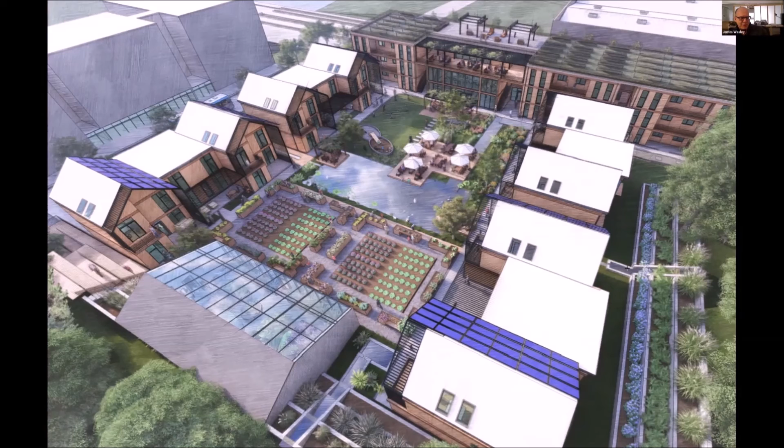I'll unmute and say, you're hired, and when can I move in? I'm blown away, Robin, and you've met really good requirements for 723 as well as your thesis project, so congratulations. I'm going to shut up and wait for the outside jurors to weigh in, but I love the thoroughness of this and the real humanity behind the vision of it, so thank you. Thank you.

Robin, it's been a pleasure to work with you this semester. And I have to say that in my practice, I have a lot of association with the development community, and it's always been surprising to me the reluctance that they've had historically to try to provide for the needs of a whole community. Just interested, like all the surrounding apartment buildings that have been built recently, just apartments alone, frequently shying away from the sort of mixed-use developments and intentional communities that could probably bring them much greater profits and be much better for the neighborhood and the community. But I've seen things starting to change, and I think it would be really exciting to see large parts of the development community be able to see a project like this one and be able to actually produce parts of neighborhoods like this in the near future.